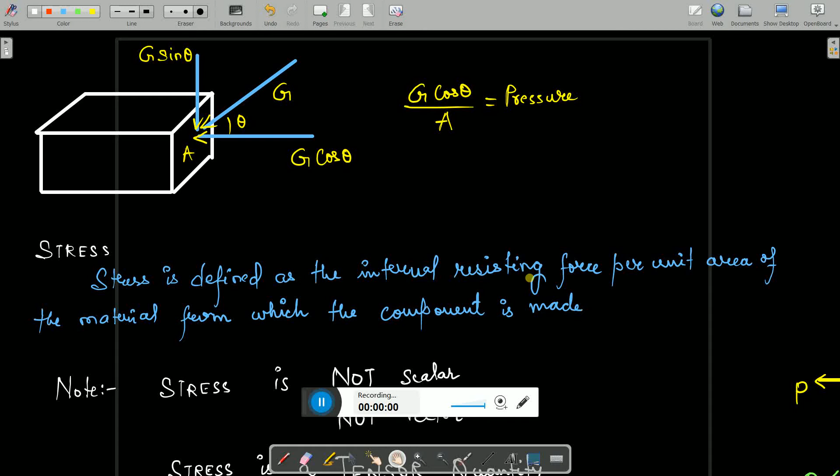In the previous lecture, I showed you this diagram, so please make a correction there. I had said it will be G sine theta by A, but please correct that. This pressure will be G cos theta divided by this cross-sectional area.

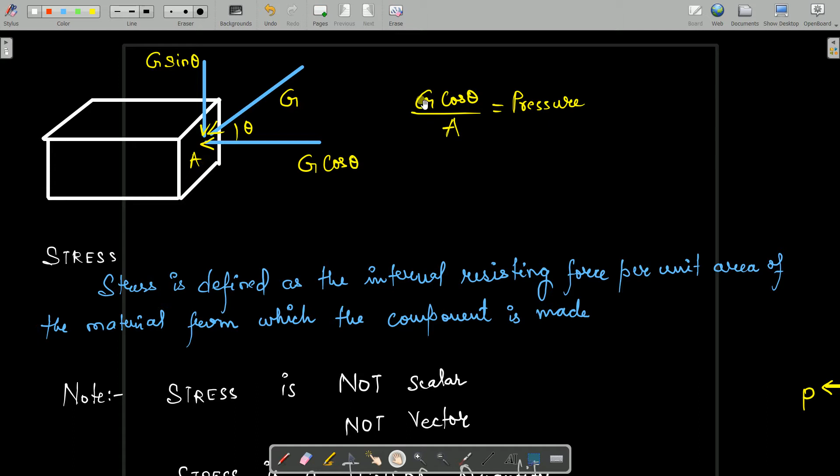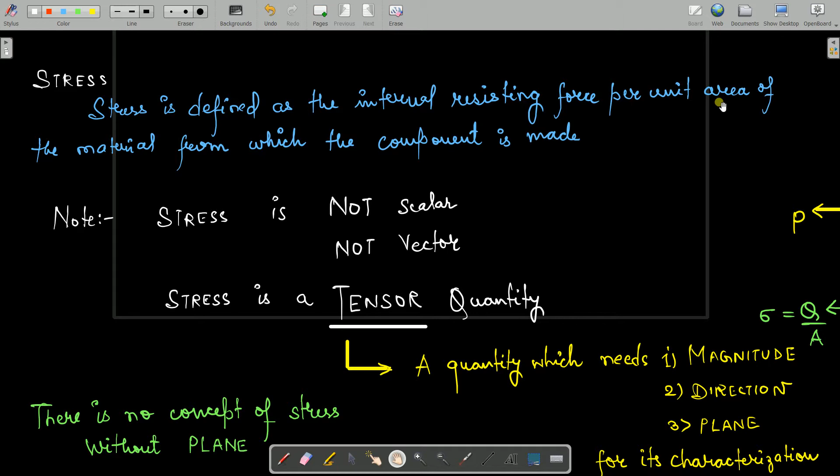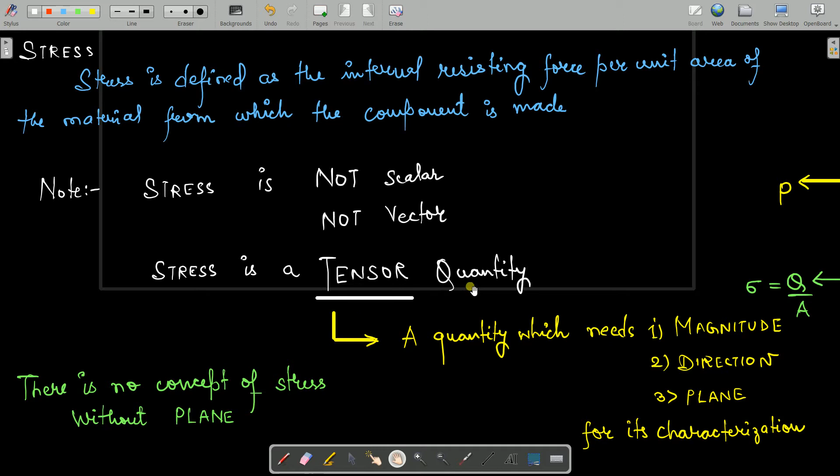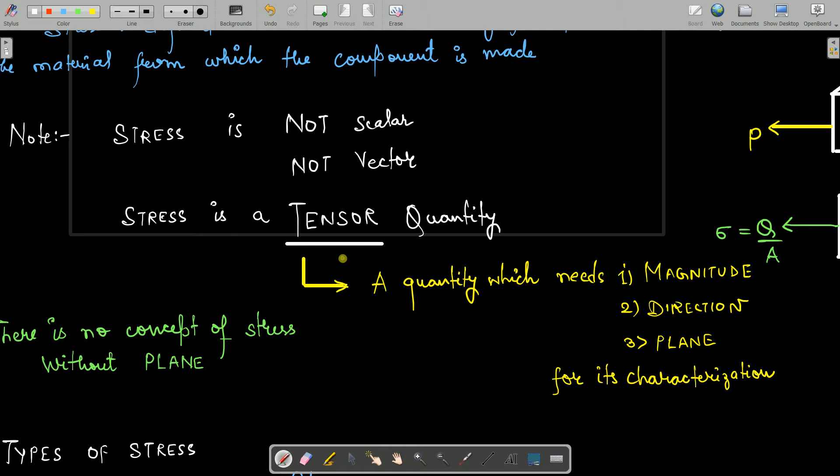Stress we defined earlier. Stress is defined as the internal resisting force per unit area of the material from which the component is made. You should note that stress is not scalar, not vector, it's a tensor quantity. A tensor quantity needs magnitude, direction and plane for its characterization. So without plane you cannot define stress. When anyone asks you what is the stress here, you need to say at which plane you are asking. There is no concept of stress without a plane, so plane representation is important in order to define stress.

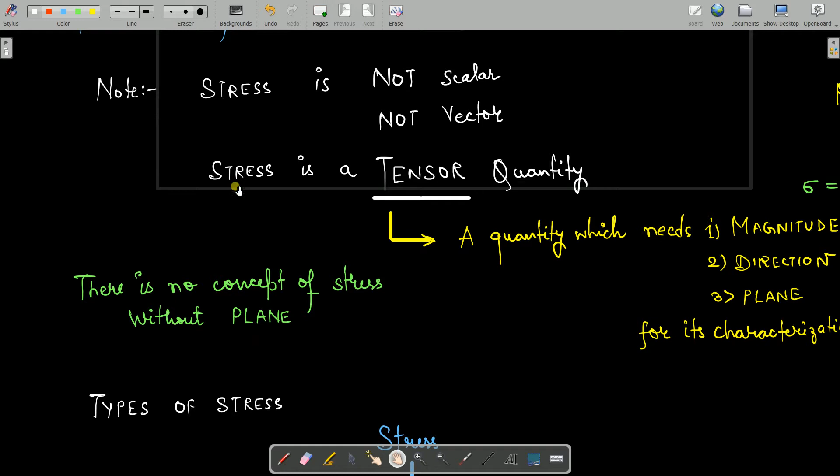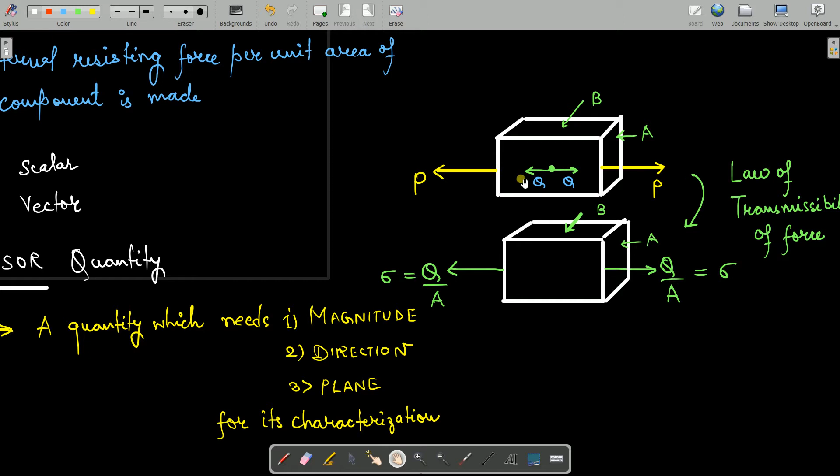As I told you in the previous class, say we have some external force P being applied on this body, and there is generation of stress inside, generation of internal force inside. Due to this left hand side P, there is a right hand Q. Due to right hand P, there is a left hand Q. Now due to the law of transmissibility of force, what does it say? It says that forces can simply be transmitted along their line of action.

As you can see along this horizontal line, I can transmit this Q force outside. So this Q which is shown towards right, I have just shifted it outside. If I take this per unit area, I can represent it as sigma, which is called stress. Since we are talking about normal stress, it's represented with sigma.

Now if we divide this internal force per unit area, which area am I talking about? This vertical area, that is area A, so this term is called stress. This horizontal area B, I have shown it separately intentionally. If I divide this Q by B, that will not give me the stress here. So if we talk about stress, I need to divide this internal force by this particular area, and hence we can represent this sigma as Q by A.

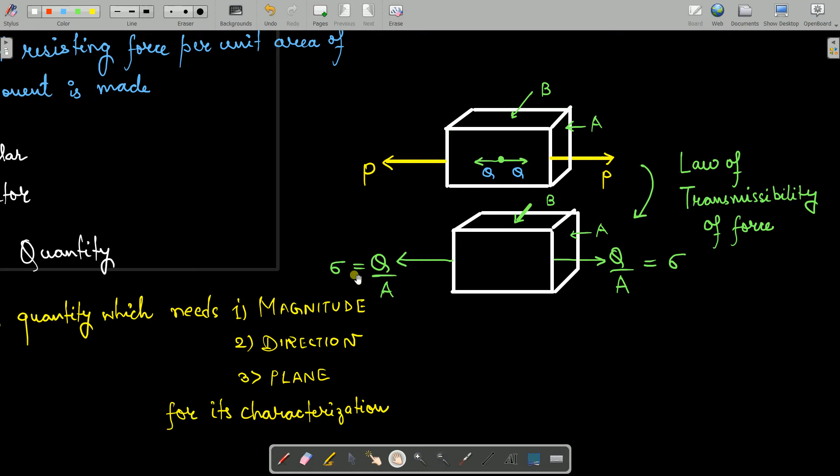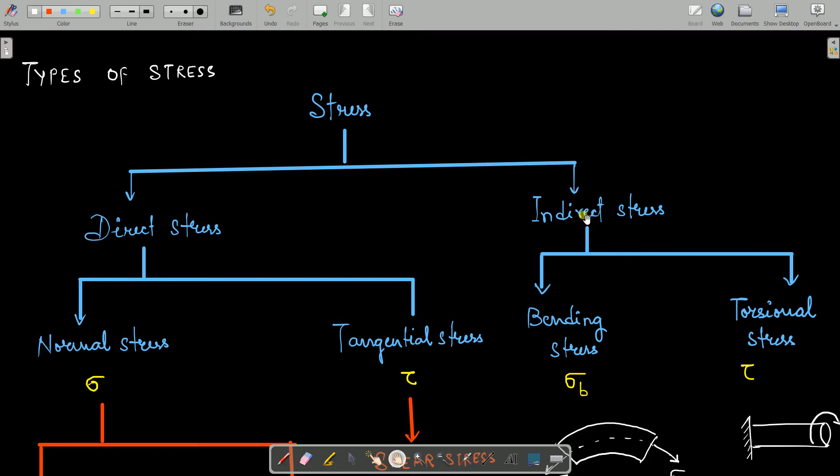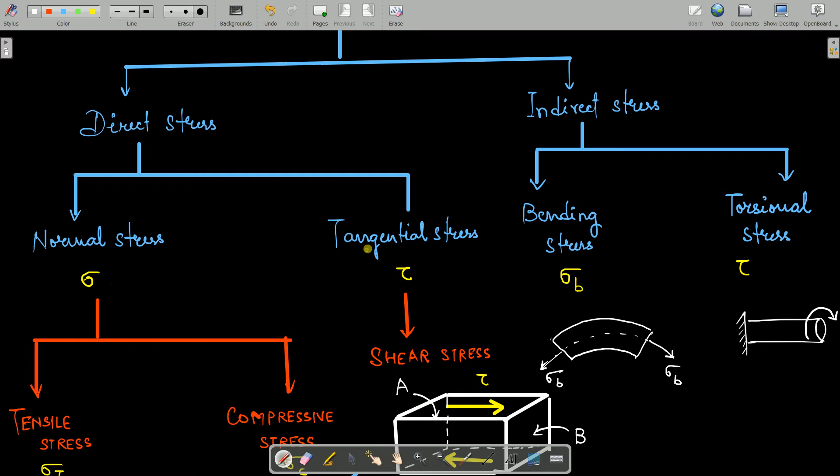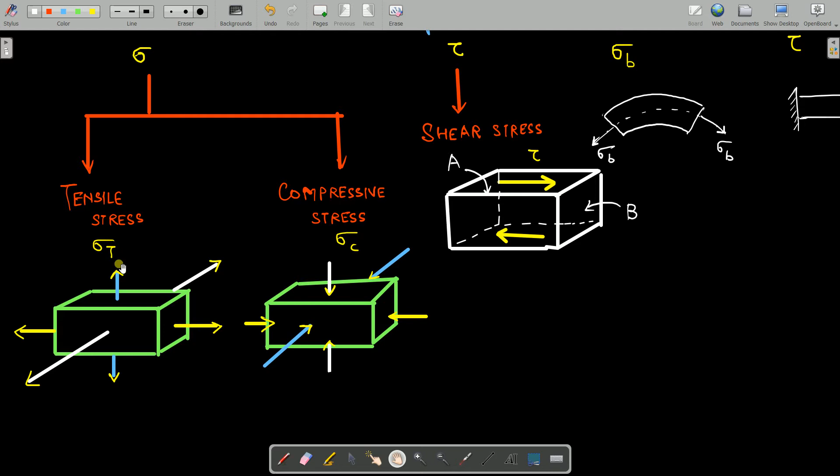Now moving to types of stress. Broadly speaking, we can classify stress under two categories: direct stress and indirect stress. Direct stress is further classified as normal stress and tangential stress. Normal stress is represented as sigma and tangential stress is represented as tau. Normal stress can further be classified into tensile stress and compressive stress, represented as sigma subscript T and sigma subscript C respectively.

Here you can see we have got a 3D body, and in this 3D body, let's consider this stress. I'm representing this as sigma x and sigma x, so this stress is along the x-axis. I'm representing this as sigma y and sigma y, along the y-axis. Then sigma z and sigma z, along the z-axis. This is the nomenclature provided.

You are assuming this axis as x-axis, this as y-axis and this as z-axis, but it's not mandatory that you have to assume this horizontal only as x-axis. If you want to rotate it, you can assume any of the axis with any of these notations or variables.

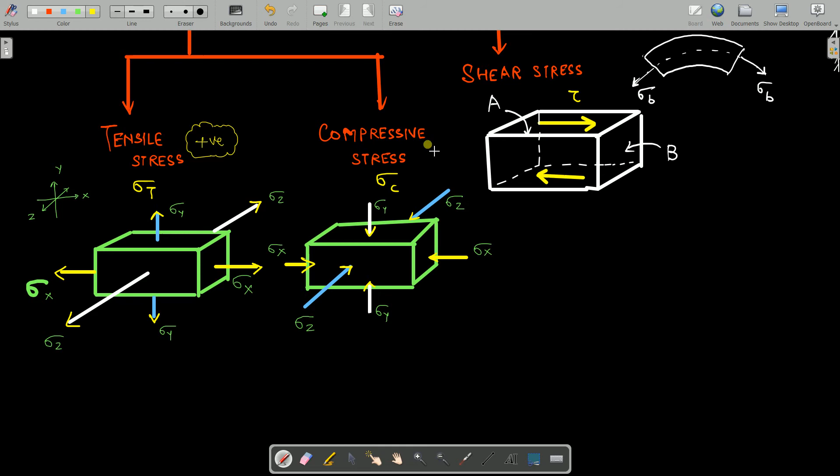Similarly for compressive stress, this we can represent as sigma z, this as sigma x and this as sigma y. You should keep in mind that whenever we talk about tensile stress, we give a sign convention for this to be positive, so we write positive values for this. And we give the sign convention for compressive stress as negative, so we write negative values for this.

Moving to another section, which is tangential stress. When you shear, when you rub anything, if you are applying any force, just opposite of that there will be some shear stress generated. I have represented it with tau on this top and bottom surface.

If I want to find tau, this is nothing but the shear force. Let's say the shear force being applied on this particular surface is P. If I divide this by B, will it give me tau? No, this will not give me tau. I need to divide with A. This will give me tau.

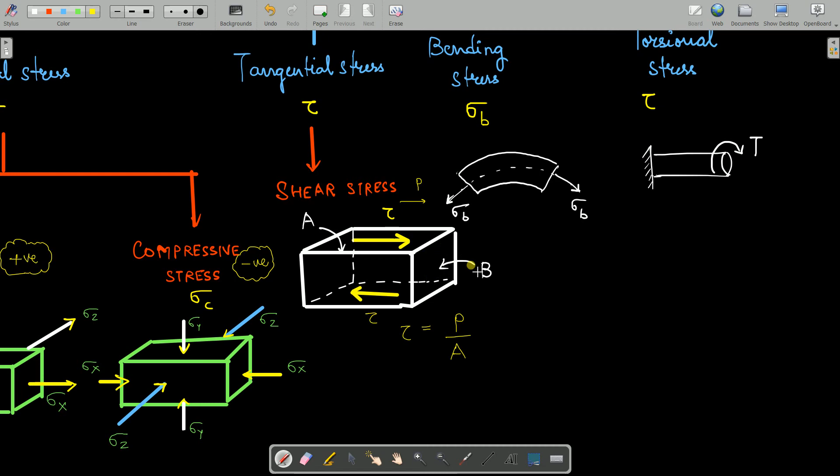Similarly, if you want to find the shear stress on these vertical planes, you need to divide the shear force acting on this by the area of this particular plane. Here, sigma is given as P by A, and here sigma is also given as P by A. What is A? A is the area corresponding to that plane which you are talking about.

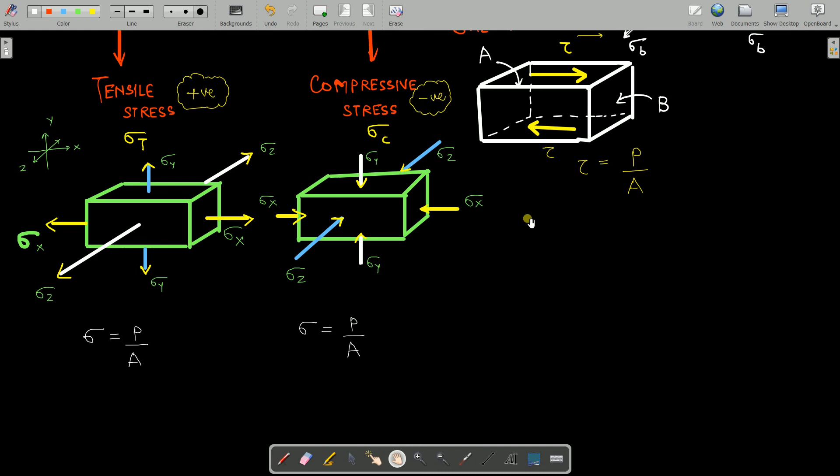So the formula for tensile stress and compressive stress remains the same, only the nature changes - tensile stress comes out to be positive, compressive stress is considered negative. We'll talk about this sign convention in detail later, this is just a mild introduction.

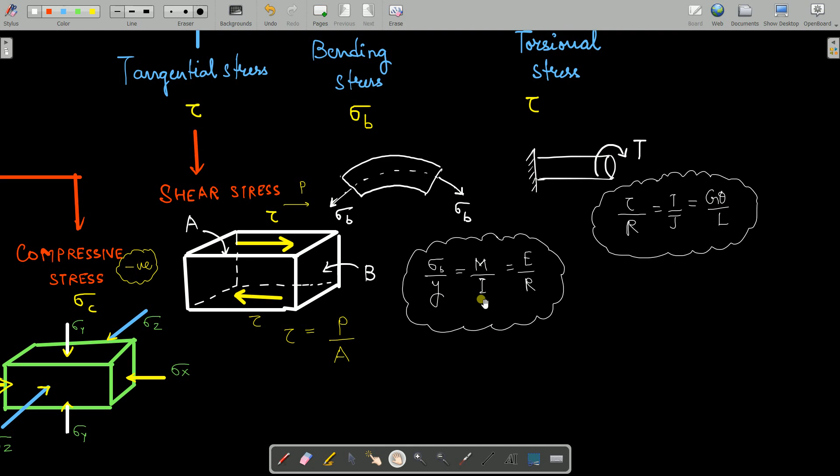For bending stress, you should remember one universal bending equation: sigma b by y is equal to M by I equals to E by R. We will deal with what these mean sometime later, but since you are starting your strength of materials, you should just memorize this relation. Similarly, we have tau by R is equal to T by J is equal to G theta by L. You should have this relation always on your tips for solving numericals. You will come to know what these are sometime later, but you should learn these relations here itself.

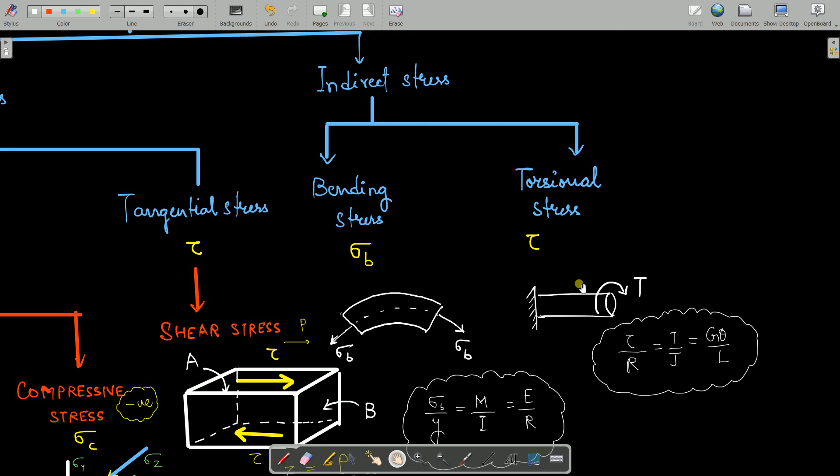Then we have indirect stress, which is due to bending and torsion. Bending means when you are bending anything, torsion means you are twisting anything. When bending, there will be compressive stress and tensile stress as well, a combination. And due to this torsional or twisting nature, we have some shear stress generated, which is called torsional stress.

Now what is the difference between this shear stress and that shear stress? This shear stress is occurring due to twisting, and here we have shear stress due to rubbing - that is the only difference. So due to rubbing, this shear stress comes into picture, and this one is due to twisting.

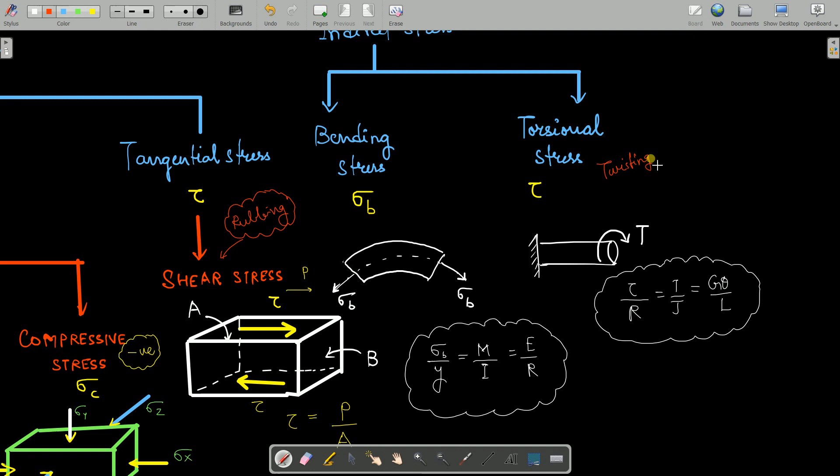So these are the different types of stresses. In the subsequent lectures, we will start picking them up one by one and doing the analysis. See you in the next lecture.